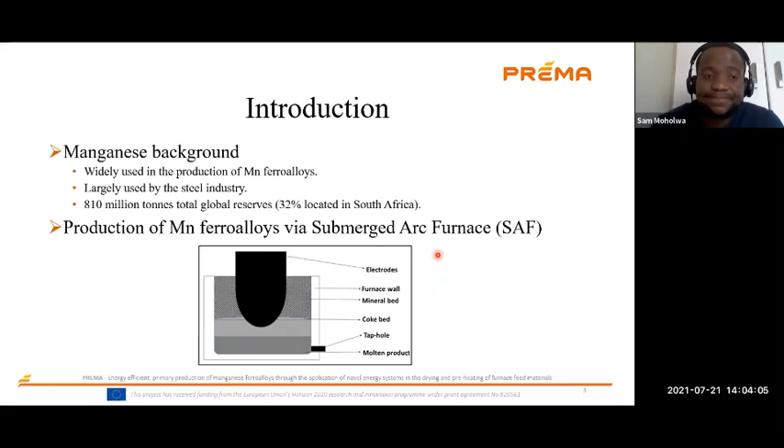Then we get into PREMA. One may ask, what is PREMA? PREMA is a Horizon 2020 project aimed at reducing energy consumption and CO2 emission through proposing innovative technologies that will help to reduce this energy consumption and the emission of CO2.

Then PREMA decided to tackle the production of manganese processes. This process sheet here is the current process that we use to produce manganese alloy. We have manganese being fed into the SAF with coke and some fluxes. Then we add electrical energy to melt this stuff. Then we get the product which will be Mn alloy, some gases and the slag.

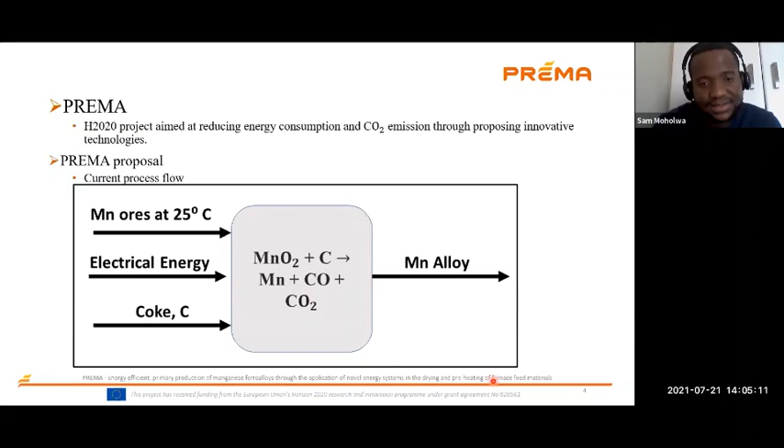Then PREMA proposed adding a preheater to this current process of producing manganese. Then the process then looked like this.

We have a manganese ore which is being preheated in a preheating unit, maybe a rotary kiln, a shaft kiln, but in this case we'll be focusing on the rotary kiln. Then we have this preheating unit being provided energy from a sustainable source of energy, maybe solar, maybe wind energy, maybe hydro energy and the likes.

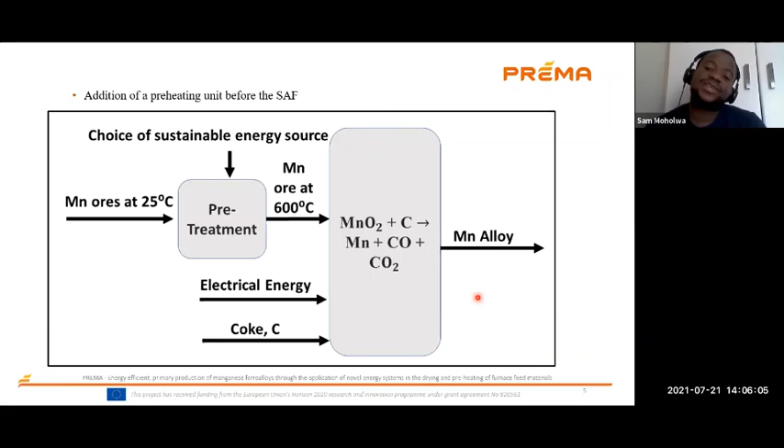So this manganese ore will be preheated to 600 and fed into the SAF as usual. Then we have the coke and the fluxes being fed into the furnace. Then we add energy to melt the reactant so that we can get our product, which will be Mn alloy, some slag and some gases.

One may ask, if you remember in the title, the presentation was about decrepitation. One may ask, what is decrepitation? Decrepitation is essentially the disintegration or the breakage of solid particles upon heating.

This formula here shows us how decrepitation can be calculated mathematically. You have a sample which you preheat, and after you preheat that sample and let it cool, you screen it, you'll get particles that are greater than -6 and less than -6 particles.

This M1 here is the mass of the particles that are less than -6, that are less than 6 millimeters after preheating. And this M3 is the total mass of the sample, meaning this mass plus this mass. Then you multiply by 100, then you get your Di -6 in percentage.

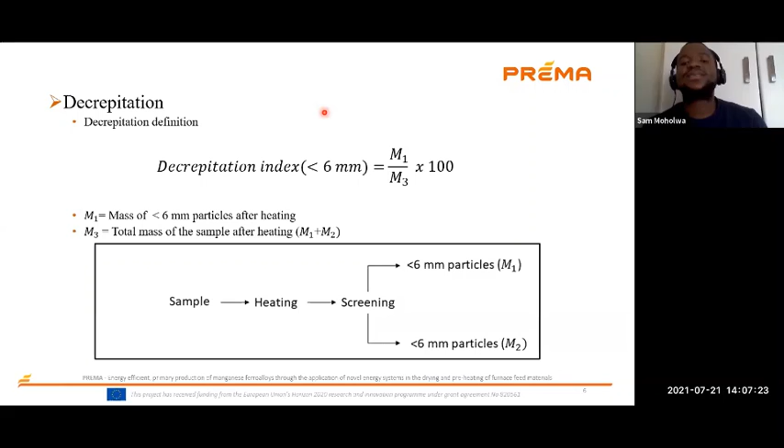One may ask, is there really a need to research this problem of decrepitation in a rotary kiln? Yes, there is a need. The way the SAF works, it doesn't work properly if it is fed fines. What I mean by fines, I mean particles that are less than 6 millimeters.

So in this current process, the ore has been screened for particles that are less than -6, and we only feed particles that are more than 6 millimeters. Now, when you preheat this ore, there's a question that arises: will this ore decrepitate? And if it decrepitates, how much of it will decrepitate? And what problems may we experience in the SAF if we feed these fines?

Feeding fines in a SAF has a number of problems. One of them is the efficiency of the SAF. As you know, when the ore, the fluxes and the coke smelt at the bottom of these furnaces, there'll be some reaction. These reactions will produce some gases, maybe carbon dioxide and carbon monoxide.

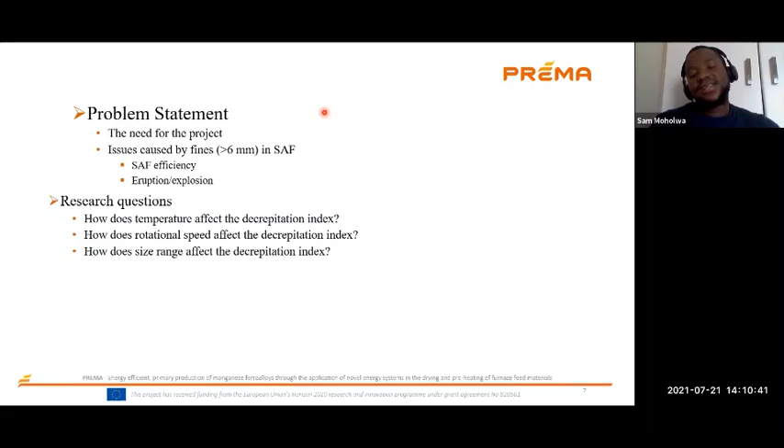We'll go a bit into the literature review. There were a number of studies done on the decrepitation of manganese ore, but we found that these three here are the most relevant.

They studied the decrepitation index of four manganese ores. These are the four manganese ores: the Urucum ore, the Morro da Mina, Azul, and Wessels. This is the typical mineralogy of these ores, and this is the decrepitation index they got in the study.

The study revealed that decrepitation of the ores studied was mainly due to the decomposition of cryptomelane at 500 degrees Celsius. The Urucum ore and the Azul ore have a slightly more than 50% content of cryptomelane in their mineralogy. Hence why we see that the decrepitation indices are almost similar.

Then the other thing is the phase transformation of pyrolusite, which occurs at 700 degrees Celsius. Transformation mainly means that a certain mineral is transforming into another mineral, and this transformation leads to volumetric changes that induce cracks that lead to decrepitation.

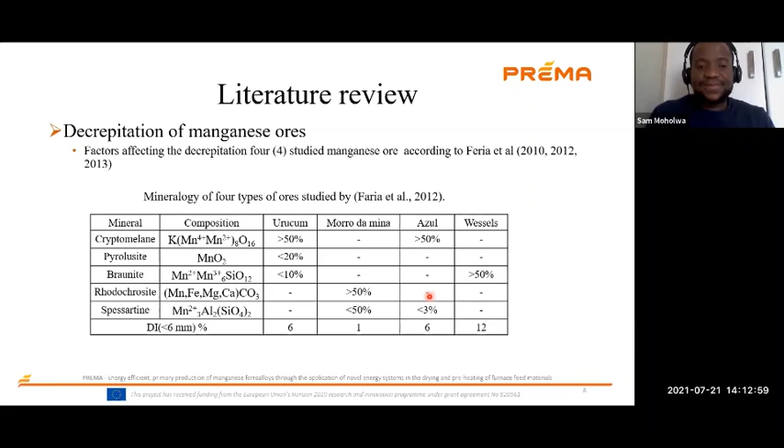We also have a transformation of braunite to hausmannite. If you go back to the mineralogy here, we can see that the Wessels ore is mainly composed of braunite. The transformation of braunite is what contributed to the highest decrepitation index of the Wessel's ore. That's why this ore has the highest decrepitation index.

Then we go to physical properties. One of the physical properties that affects the decrepitation index of these ores is the moisture content. These ores differ in terms of porosities, and some pores within these particles may be closed pores while others may be open pores. You may have moisture trapped in these closed pores.

When you have moisture trapped in closed pores and you heat it, the vapor pressure of that moisture in the closed pores will rise. Sometimes as the ore is heated further, the vapor pressure of that moisture in those pores may rise high enough to cause rupture in the particles and increase porosity.

Generally, ores that are more porous are weaker; they can easily break at a lower vapor pressure. Let's say we have the same ore with the same moisture content, and some of the moisture is trapped in the closed pores. Obviously, the weak ore will rupture at a lower vapor pressure compared to the strong ore.

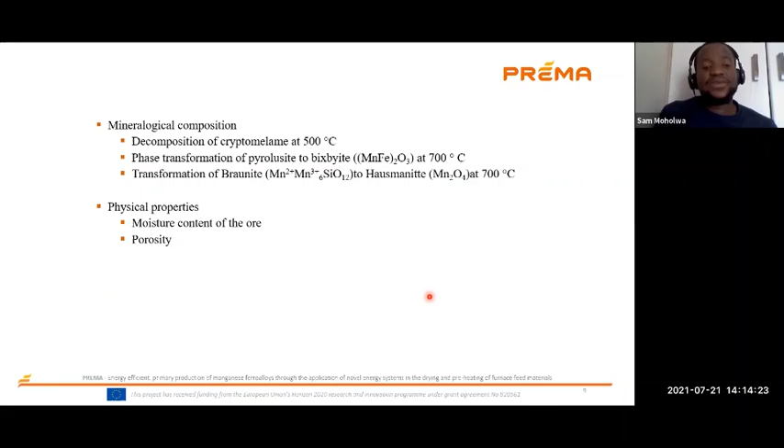Then we move to decrepitation in rotary kilns. Decrepitation in a rotary kiln is mainly affected by two factors: the tumbling action, which is the movement of particles in the kiln, and residence time. But since the residence time has been kept constant in this case, we'll only be focusing on the tumbling action that happens inside the kiln.

This tumbling action can be further divided into three mechanisms. We have abrasion, a process where two particles of the same size rub against each other as the kiln is moving, and this friction may produce fines. Then we have attrition, whereby two big particles rub against a small one to produce fines.

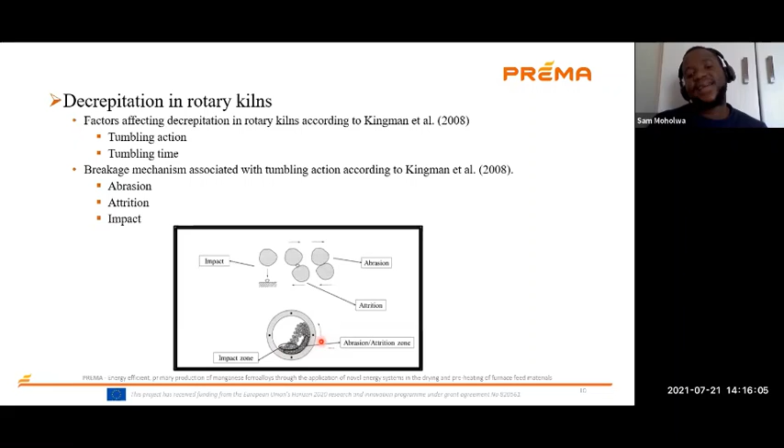We'll now move to the methods. We sourced three types of ores for this research, then we labeled them OA, OB, and OC.

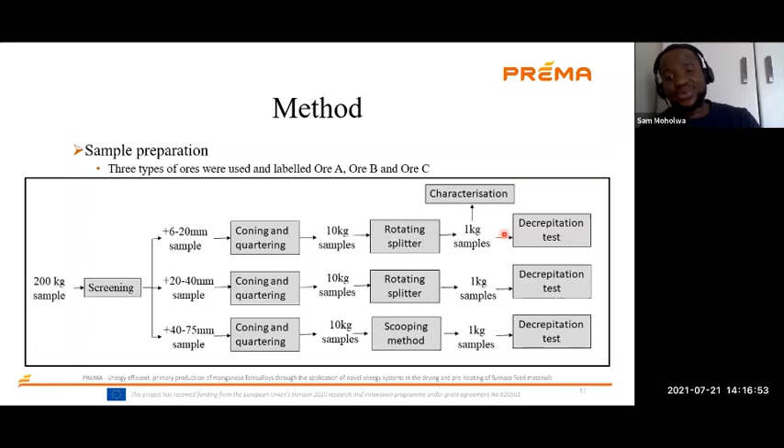Approximately 200 kg of each ore was sourced. This 200 kg was taken through screening to get three size ranges. These were then taken for coning and quartering so that we can get 10 kg samples, which will then be taken to a rotating splitter so that we can further split them into 1 kg samples, which we are going to use for the decrepitation test, and take some for the characterization.

The as-received ore was taken for the following characterization techniques. We have ICP-OES to determine the chemical composition, we have quantitative XRD to determine the minerals present and their quantity, and we took them for SEM-EDS to determine the texture and other properties. After preheating this ore, the sample was then taken through the same characterization techniques.

Then the as-received samples again were tested for their physical properties. We did helium pycnometry to determine the porosity of this ore. We also determined the loss on ignition. We also dried these samples overnight to determine the moisture content, and we determined the bulk density. This bulk density was determined per size range.

Remember, we screened the samples into 3 size ranges: +6 -20, +20 -40, and +40 -75 millimeters. So we determine, let's say for OA, the bulk density for +6 -20, then again for +20 -40, and the same applies for +40 -75 millimeters.

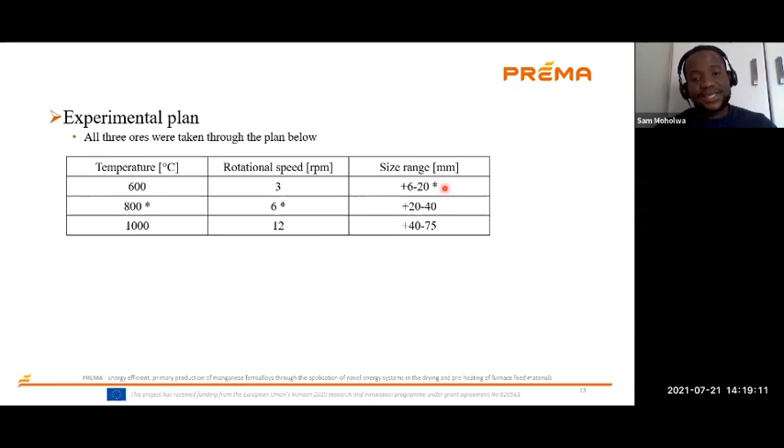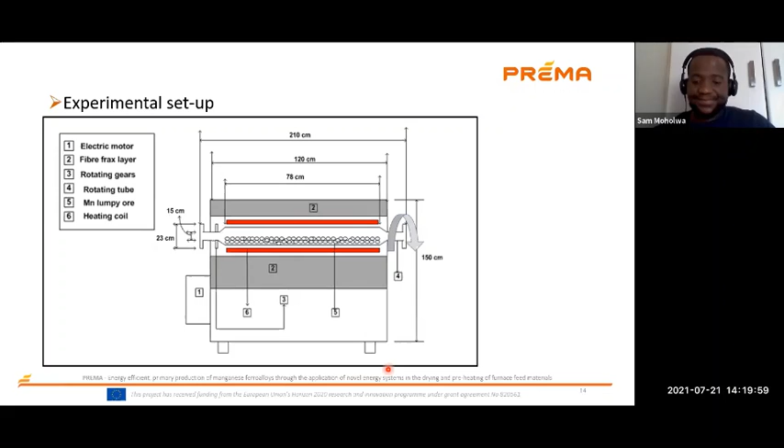Here is the experimental procedure. Firstly, we switch on the kiln power and rotation, and we set the set-point temperature, depending on the test, maybe 600, 800, or 1,000, as we have seen in the experimental plan. This kiln was allowed to heat so that it can reach the temperature inserted into the controller, which may be 600, 800, or 1,000. After the kiln reached the desired temperature, 1 kg of the manganese ore was fed into the kiln.

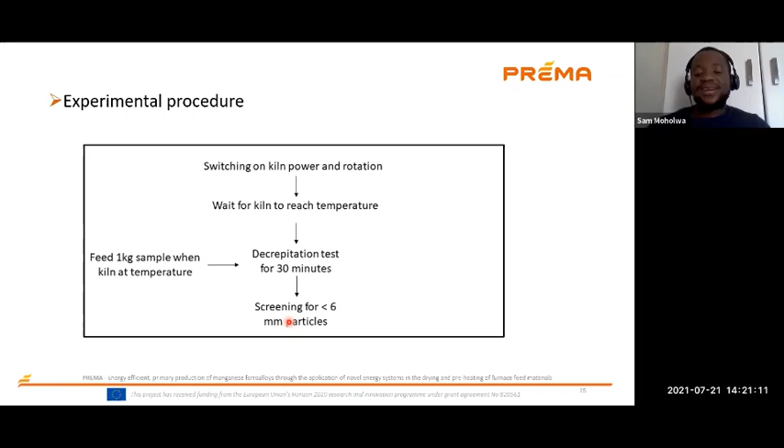Then the sample was left to rotate and heat for 30 minutes. After heating, the sample was allowed to cool inside the kiln overnight. The following day, the sample was removed from the kiln. Then we screened this sample to get particles that are less than -6 millimeters to determine the decrepitation index.

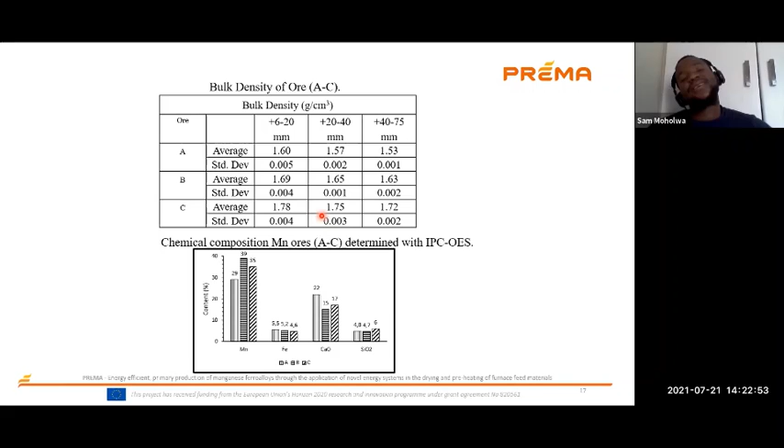Here we have the bulk density result. As mentioned, this bulk density was determined per size range. We have OA, for which we did the bulk density for +6 -20 millimeter particles, at 1.6 grams per cubic centimeter. As you increase the size range, you can see that the bulk density decreases, which is expected because as the size range increases, the particles become bigger and more bulky, and when placed in a certain volume, as we did in this test, the particles have more spaces between them.

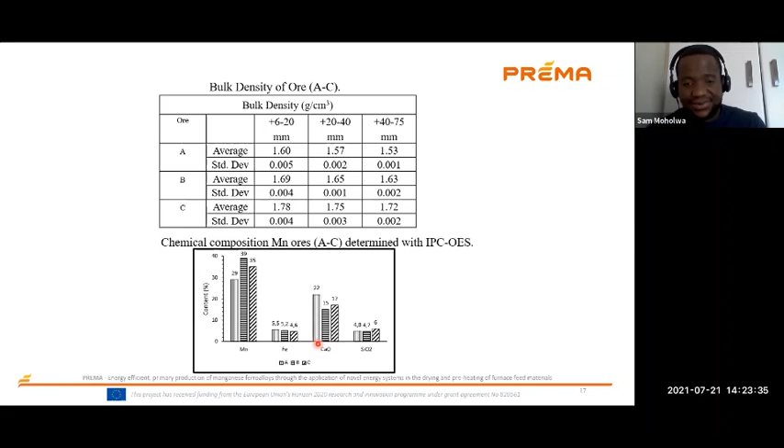This here is the chemical composition of the ores used in this study: A, B, and C. You can see we are reporting the manganese content of this ore, the iron, the calcium oxide, and the silica oxide. B has the highest content of manganese at 39%. We have iron content being highest in OA at 5.5%, calcium oxide being highest in OA, and silica dioxide being highest in OC.

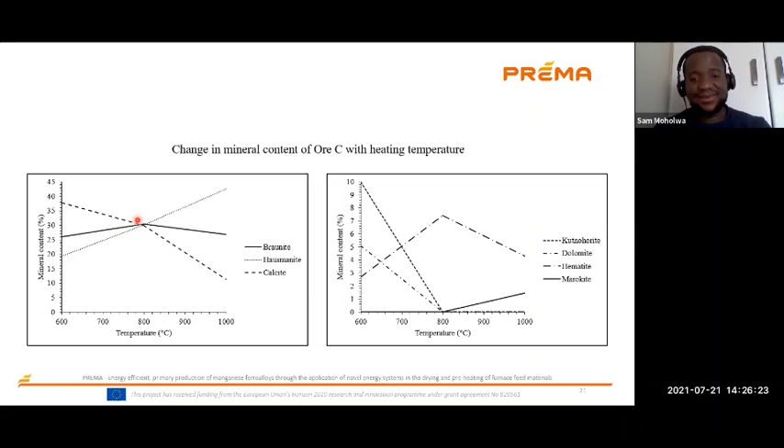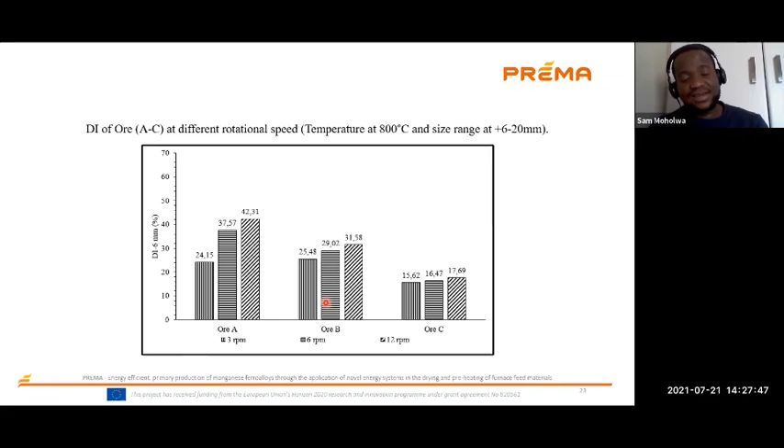For this, you can see it's the same thing - increasing the RPM. We have 3, 6, and 12. You can see that the DI is increasing, the same applies to OB and OC.

Then now we move to the discussion of the effect of temperature. As mentioned earlier, temperature increases the decrepitation index of this ore. Now the main question is why? Why does increasing temperature increase this DI?

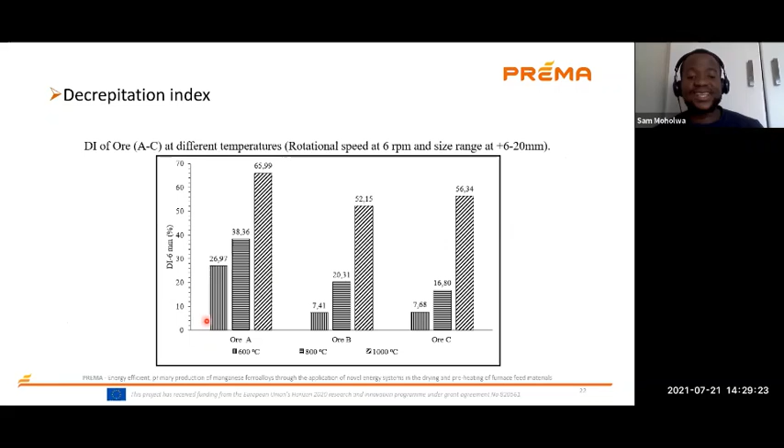One of the reasons is due to the decomposition of kutnohorite, which has this ideal composition. This kutnohorite decomposes at 500 degrees Celsius. And if you remember, going back to the mineralogy, OA has the highest content of kutnohorite, which is why OA is more susceptible to decrepitation because of this kutnohorite content. As you raise the temperature, the decomposition of kutnohorite intensifies with the increase of temperature, which is one of the reasons why the DI increases as you increase the temperature.

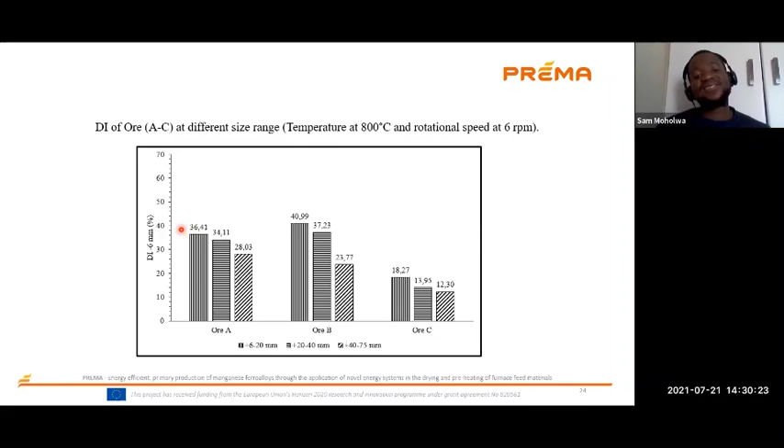One other reason is the transformation of braunite into hausmannite at a temperature of 700. If you can remember, you can go back to one of these graphs. As you can see, braunite is decomposing, hence why it's dropping, and hausmannite is being produced from this transformation of braunite, hence why we have hausmannite increasing. This transformation is one of the reasons why the decrepitation increases as you increase temperature, because as the temperature increases, this process of transformation of braunite into hausmannite intensifies.

One other thing you need to know is that braunite and hausmannite have different crystalline structures, which means if you have braunite transforming into hausmannite, you have a certain mineral transforming into another. You have a change in crystalline structure from one structure to another, meaning there is a volumetric change when braunite transforms into hausmannite. This mineral change is responsible for the formation of these cracks.

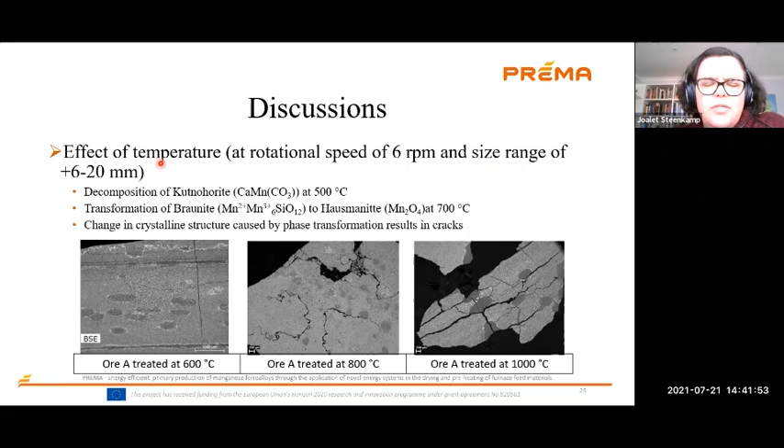So this is definitely a temperature-dependent phenomenon. Okay, then from Robert Cromarty from University of Pretoria: the influence of particle size is a bit unclear. And then he has a follow-up comment or question: the mid-size range seems to have a higher decrepitation. How is this explained? So maybe just go to that.

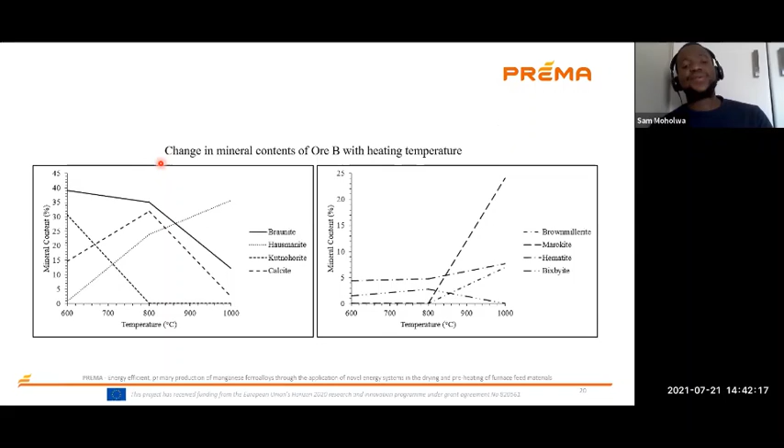Okay, we can go here. Do you say, what did you say, which one has the highest decrepitation index? Ore B? Ore B, yeah, okay. Okay, we can go to these physical properties here. B, as you can see, I don't know how to put it, but...

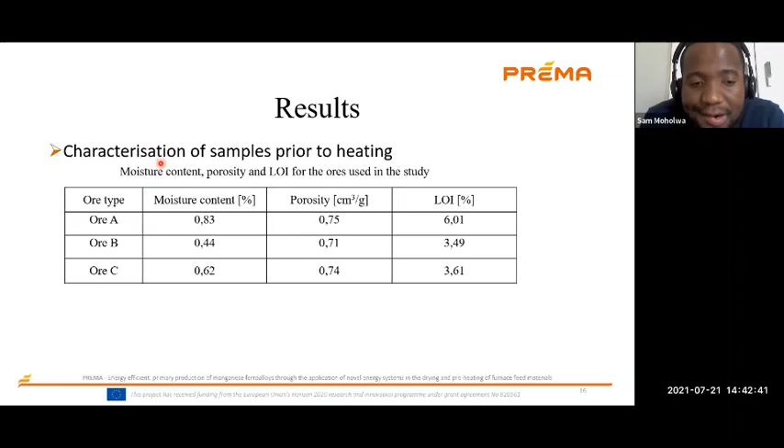B, it was like, even though it was not the most porous, it had, let's go to the mineralogical content. As you can see, B also had some braunite, had the highest content of braunite compared to the other two. So the reason B may be having one of the highest indices when the size range is being investigated may be due to this transformation of braunite.

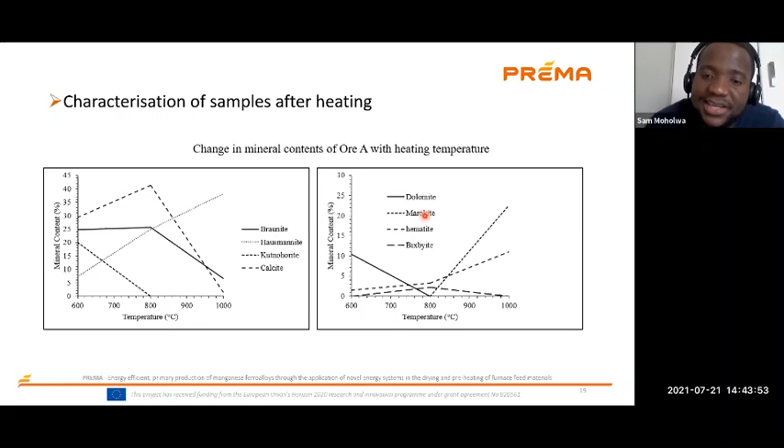Remember, when we investigate the effect of rotational speed or the effect of size range, it doesn't necessarily mean that the mineralogy will be taken out. One of the reasons why B may have the highest DI may be due to this high content of braunite. If you check, we said braunite transforms at 800. If you look at this graph, you have a much steeper gradient when you move from here to here. This is generally because it is transforming the braunite. I don't know if that answers your question.

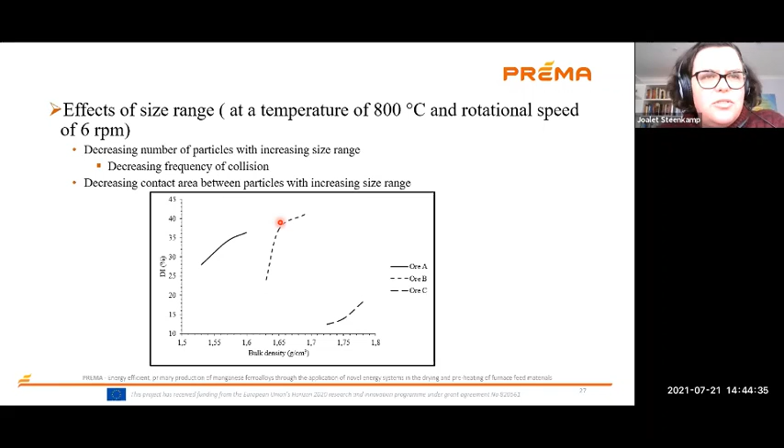Peter Cox asked: did you evaluate the effect of rotary furnace diameter on fines production? No, we didn't, not yet, because that would actually require us to manufacture another rotating tube of different diameter. But that's definitely something we can investigate, provided we get the funds. Also, we are going to run a pilot scale rotary kiln towards the end of the year, and it might be a good idea to repeat some of the experiments there. So thank you for that question, Peter.

I think, Arman, just to comment on that, the manganese minerals are really complex in terms of mineralogy, and FactSage databases don't contain a lot of the phases, but I do think hausmannite and braunite are in there, so it would be interesting to run a few calcs. Then, if I just go through the comments section.